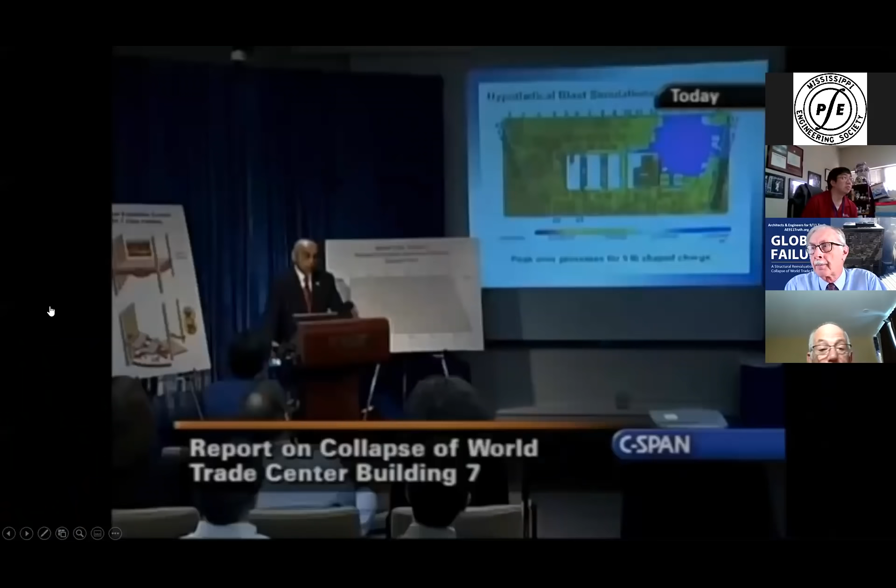Listen to NIST spokesperson Shyam Sunder's unqualified statement: 'What we found was that uncontrolled building fires caused an extraordinary event. The collapse of World Trade Center 7 was primarily due to fire.'

Architects and engineers had done enough research to recognize that fires alone did not explain the cause of collapse of Building 7. To delve more deeply into what caused Building 7 to collapse, architects and engineers funded a 4-year study led by Dr. Leroy Hulsey.

So what's the problem? Prior to 9/11, no other steel frame high-rise buildings had totally collapsed due to fire. Therefore, it is essential that the failure mechanism for this building be understood. Subsequently, the UAF agreed to re-examine what caused Building 7 to collapse.

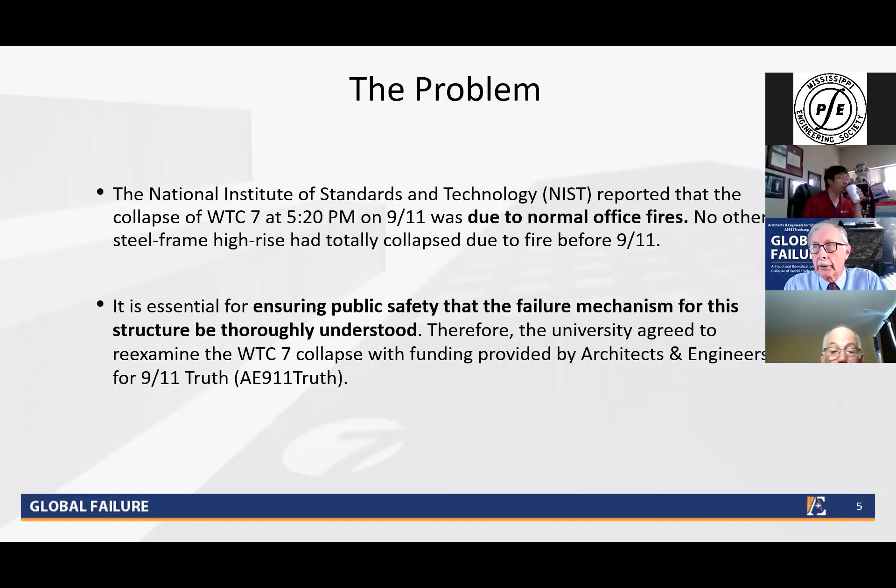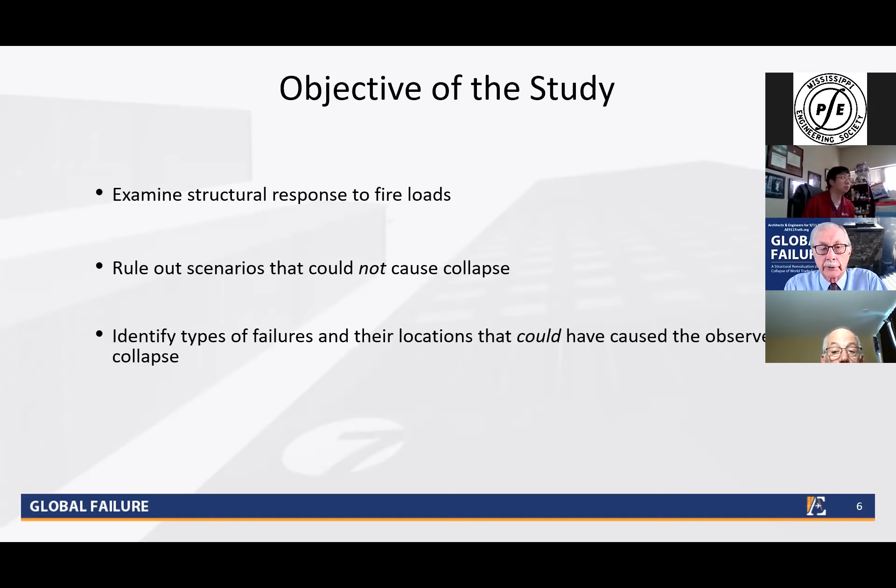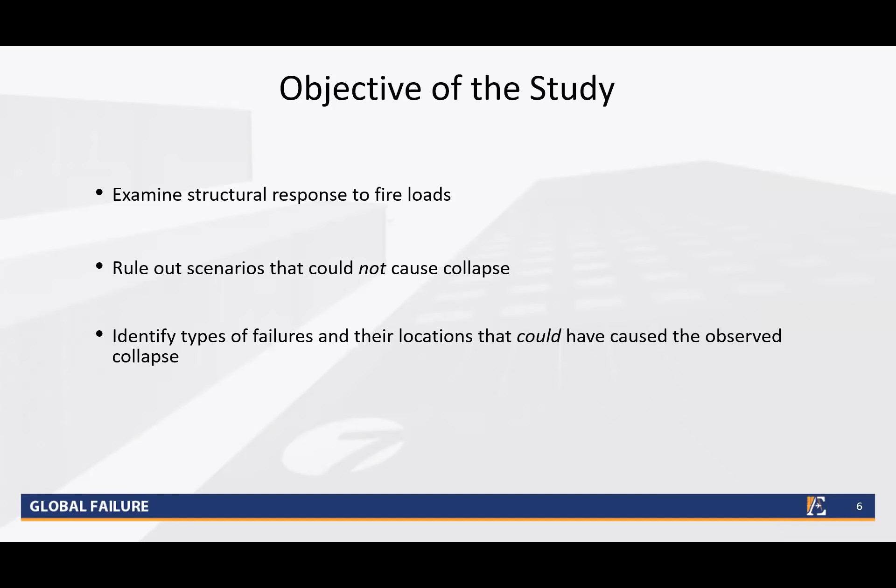The objective of the UAF study was to, one, examine the structural response to fire loads; two, rule out scenarios that could not cause collapse; and three, identify types of failures and their locations that could have caused the observed collapse. The UAF study used the same material properties that NIST used.

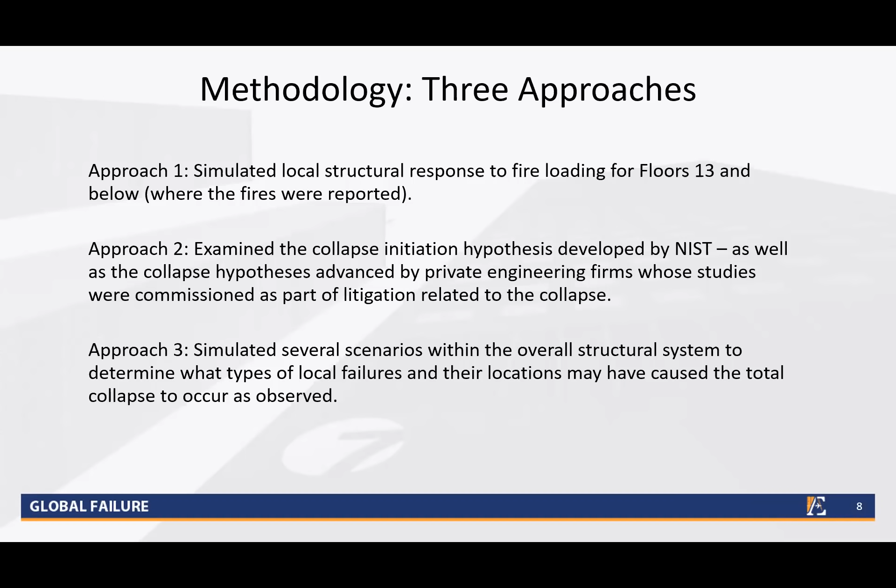The methodology included three approaches: one, simulate the structural response to the fire loading; two, examine previously developed collapse hypotheses; and three, simulate scenarios that are consistent with the building collapse as observed. They studied reports previously issued by FEMA, NIST, and two private parties.

Well, how, where, and to what extent did Building 7, shown in brown on the next slide coming up, located about 350 feet from World Trade Center number 1, get damaged?

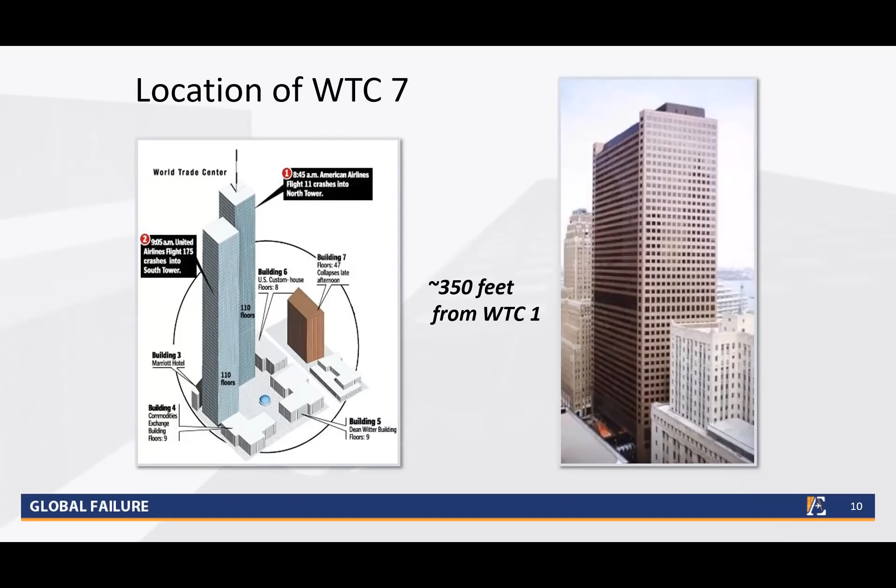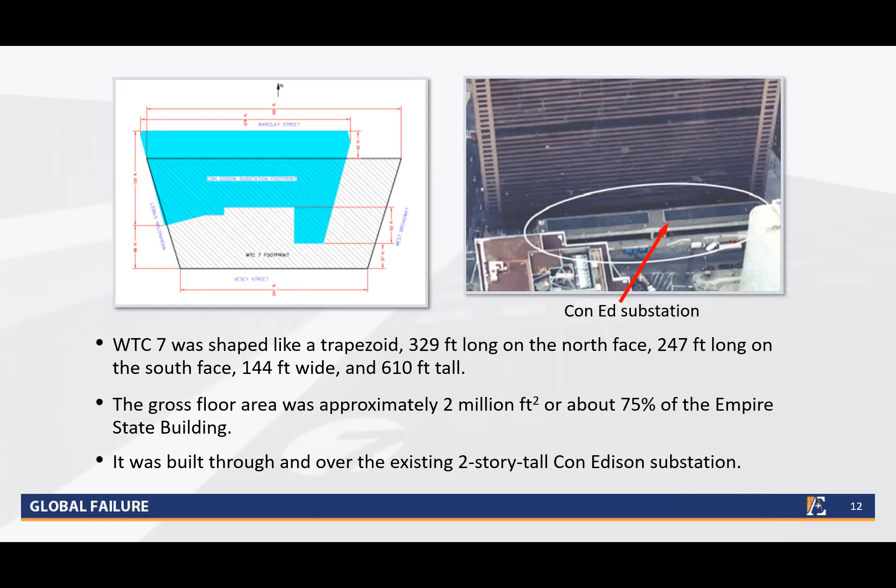Building 7 was built through and over the existing 2-story tall Con Edison substation. The plan view on the left shows the trapezoidal crosshatched footprint of Building 7 and the Con Edison substation footprint in turquoise. Rotate the plan view 180 degrees to relate it to the top of the substation in the picture. The Building 7 columns were supported through the substation.

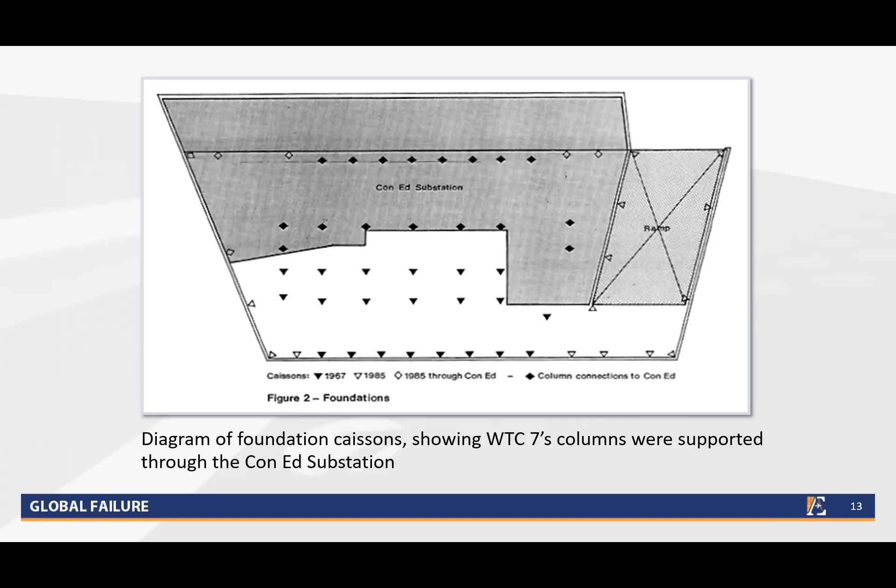There were 82 columns, 58 on the perimeter, and 24 in the central core.

The most northeasterly column in the central core, number 79, was the most heavily loaded column by virtue of the floor area it supported, and because much of the load from the east penthouse was supported by column 79.

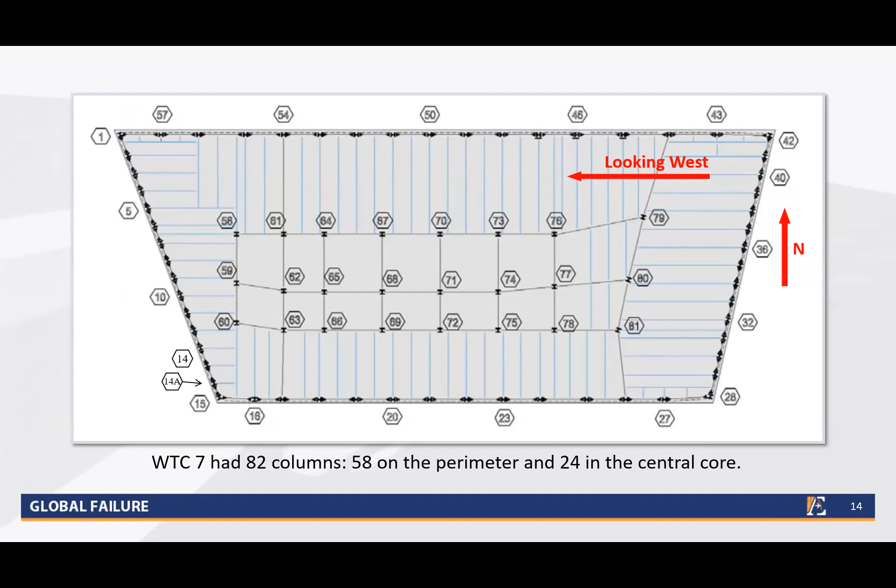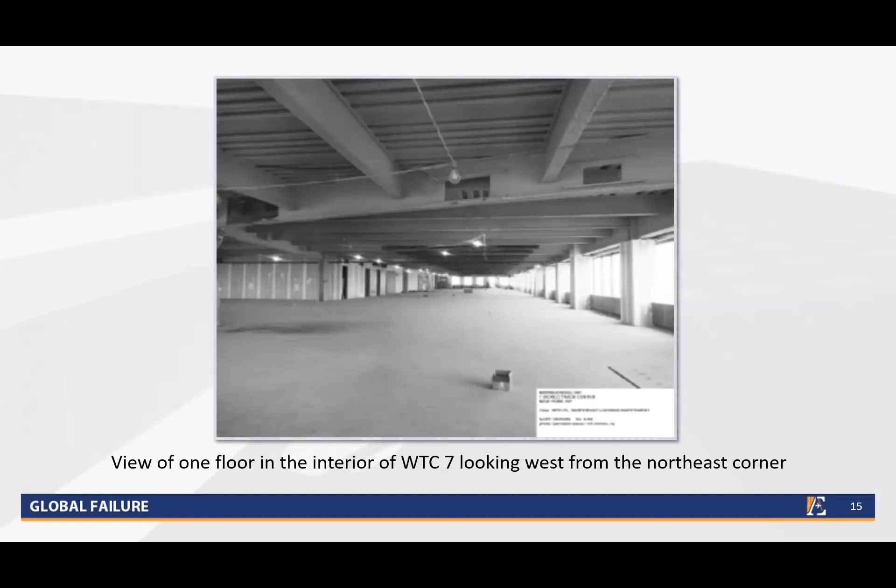A looking-west picture taken during construction is shown next. Column 79 is just out of view on the left. The girder that frames into column 79 runs across this picture. NIST claims that the girder on this line, on floor 13, was forced off its bearing pad at column 79. We'll take a closer look at these details shortly.

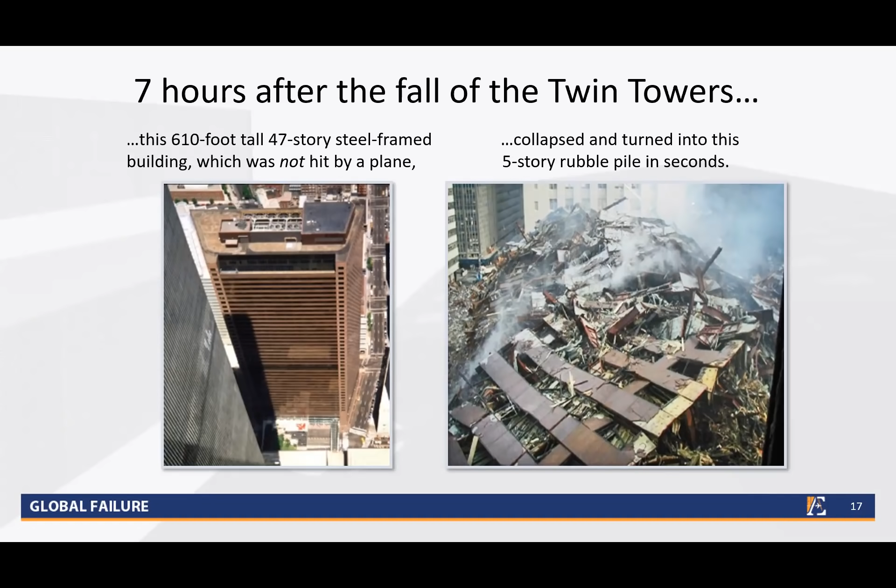Here's a video that starts after the east penthouse had already fallen below the roof level. Listen closely to how the reporters described what they were seeing and hearing.

For the third time today, it's reminiscent of those pictures we've all seen too much on television before, when a building was deliberately destroyed by well-placed dynamite to knock it down.

Did they actually use the word 'brought down', and who was it that was telling you this? The fire department, and they did use the word, 'we're going to have to bring it down.'

We heard this sound that sounded like a clap of thunder. It looked like there was a shock wave ripping through the building, and the windows all busted out. About a second later, the bottom floor caved out. The building followed after that, and we saw the building crash down all the way to the ground.

And I turned in time to see what looked like a skyscraper implosion. It looked like it had been done by a demolition crew, the whole thing just collapsing down on itself. It was almost as if it were a planned implosion. It just pancaked.

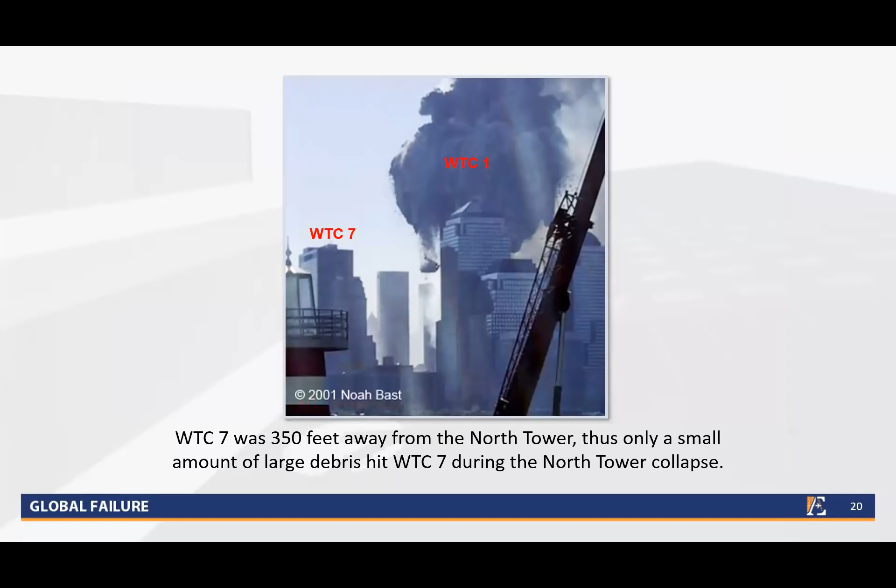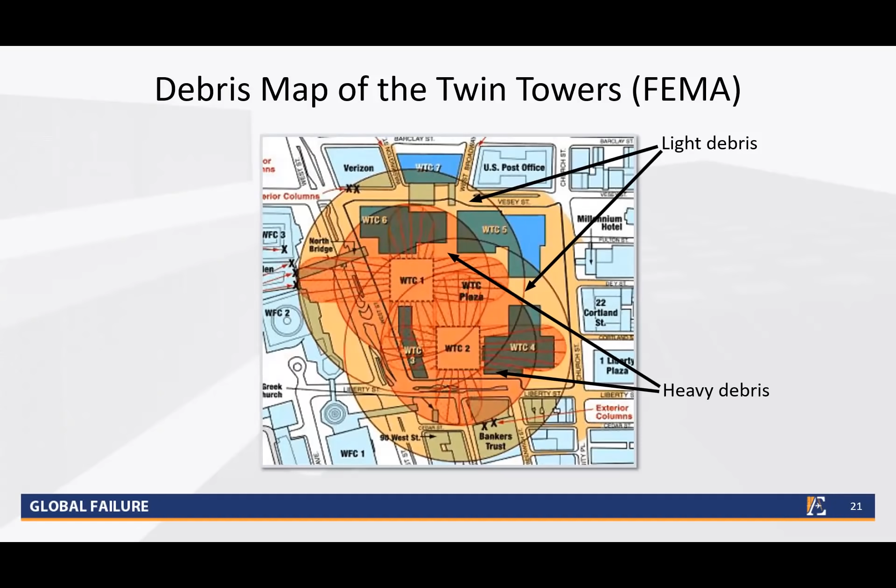Again, Building 7 was 350 feet away from Tower 1. Buildings 3, 4, 5, and 6 were subjected to much heavier debris fallout from the towers than was Building 7, seen near the top, all of which suffered extensive damage. However, none of them totally collapsed like Building 7 did.

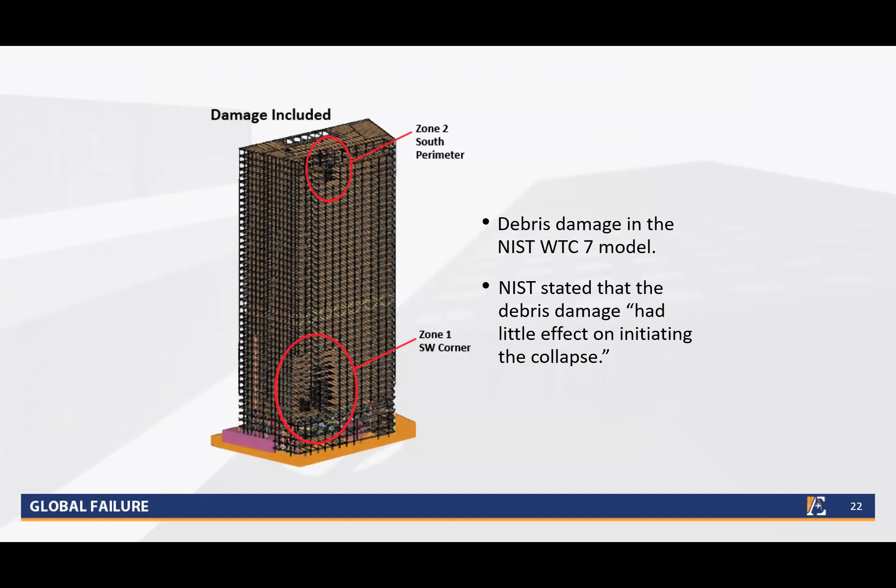According to NIST, most of the debris damage occurred near the lower west end of the south face of Building 7, but they claim that a progressive collapse was initiated with the collapse of Column 79, located in the diagonally opposite area of the building.

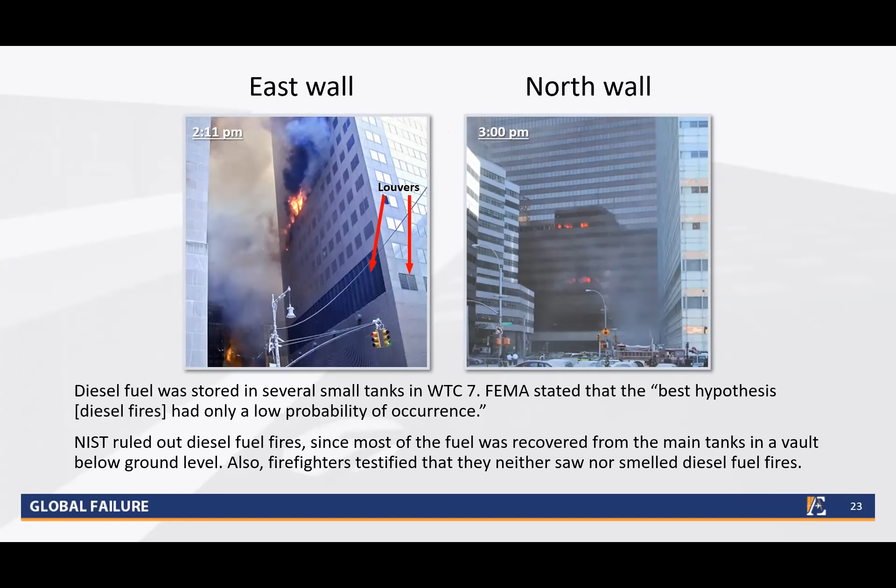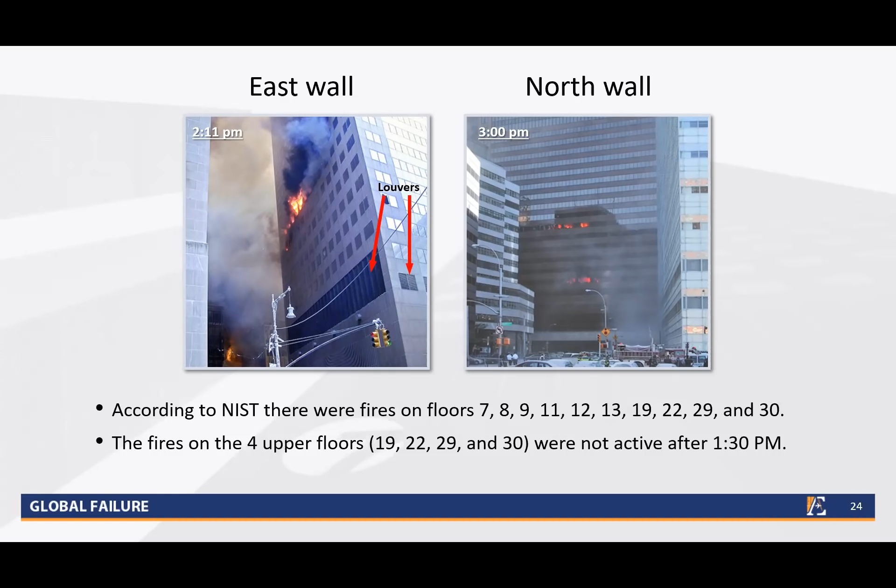Fires were observed on the two sides of Building 7 that were shielded from tower debris, on floors located primarily between the 7th floor and the mid-height of the building.

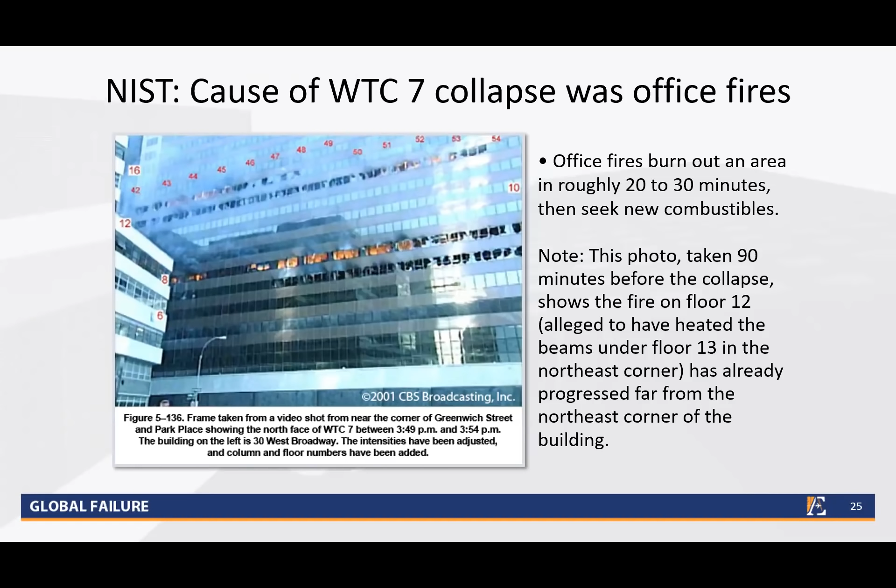This is the north wall. Floor numbers are shown up the left side and column numbers across the top. This photo, taken 90 minutes before the collapse, shows that the fire on floor 12 has already progressed far from the northeast corner of the building. The NIST collapse theory, in summary, is that the floor beams in the northeast corner of floor 13 pushed the

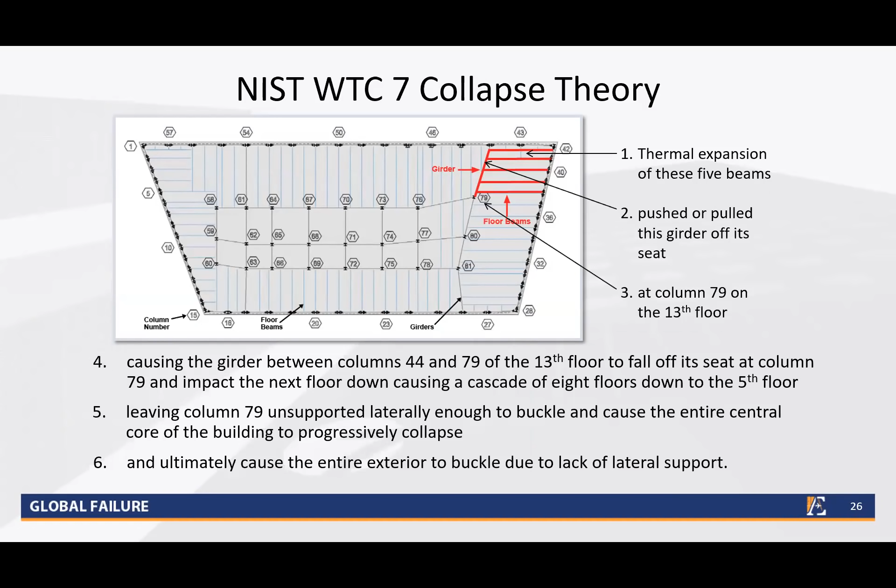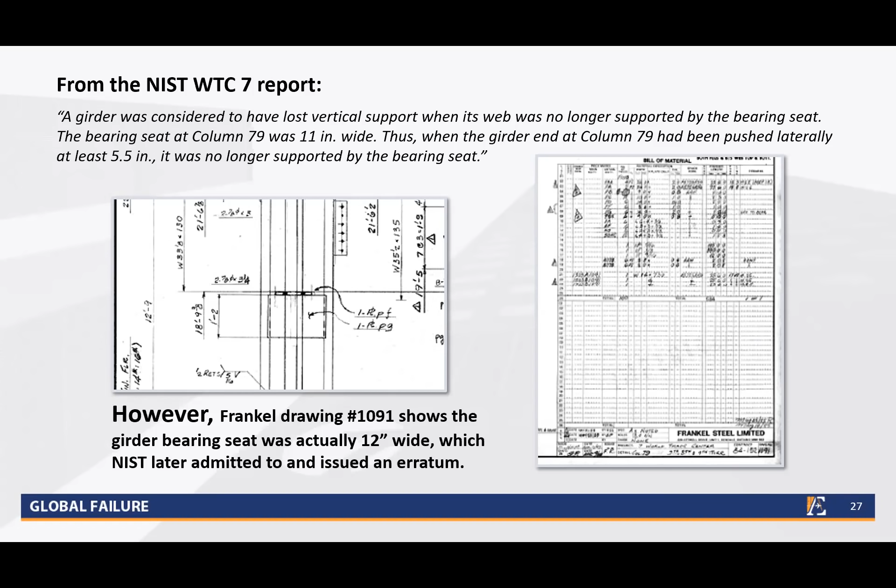interior supporting girder off its supporting bearing pad on column 79, precipitating a progressive collapse of the entire building. But was it possible for the girder to be pushed off its bearing pad? NIST initially claimed that the bearing pad was 11 inches wide, and once the girder had been pushed laterally 5.5 inches, it was no longer supported. However, the shop drawing showed a 12-inch wide bearing seat, which NIST later admitted to.

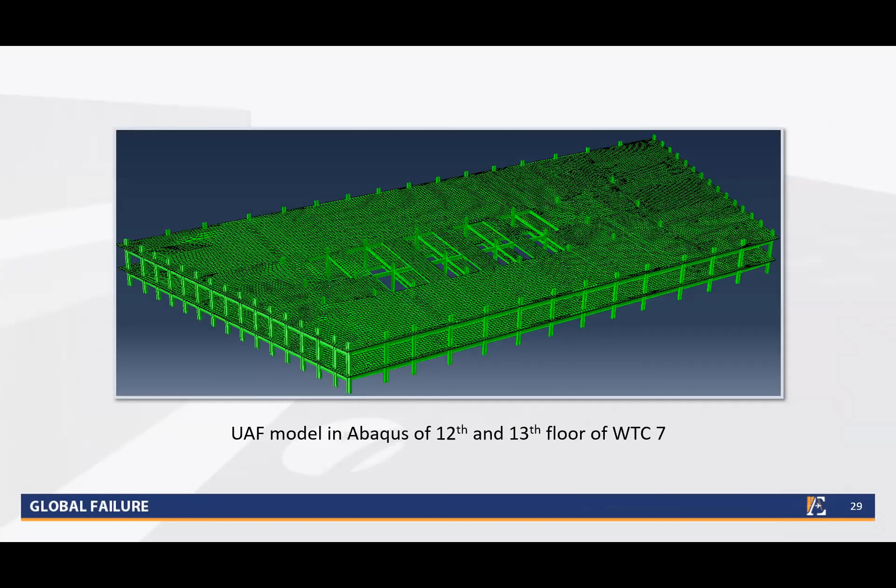A progressive failure starting at column 79 was the key to NIST's explanation of the cause of collapse. The UAF study therefore examined the related conditions in depth. The girder movement relative to its bearing seat at column 79 was examined using two different programs in various boundary conditions. Here's their Abaqus model of the 12th and 13th floors.

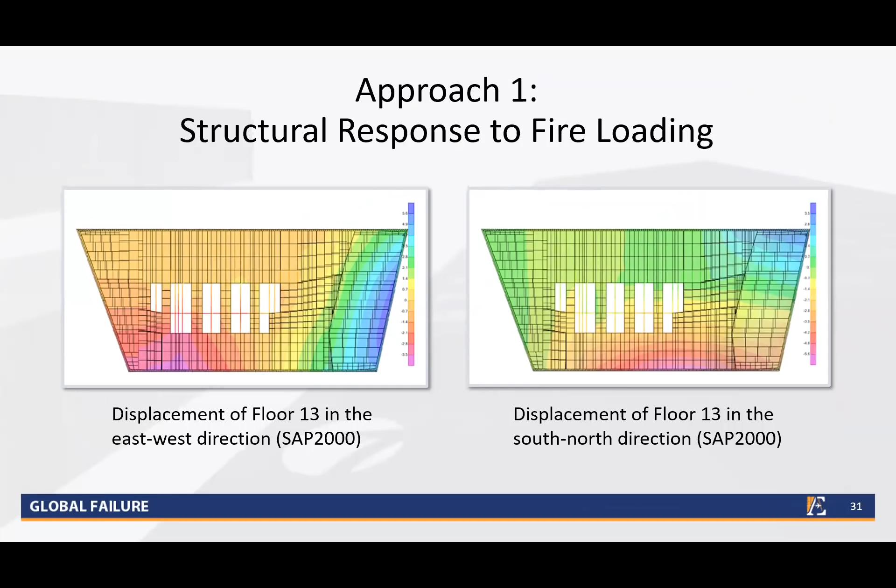NIST worst case 13th floor temperatures were used in the UAF model. Floor 13's displacement was calculated using the SAP 2000 program and NIST's temperature conditions. The eastward movement is greatest along the east edge of the floor, the area shown in blue. However, NIST based its analysis on the assumption that the east end of the floor beams did not move. Hence, their calculations showed 6.25 inches of floor beam displacement at the girder.

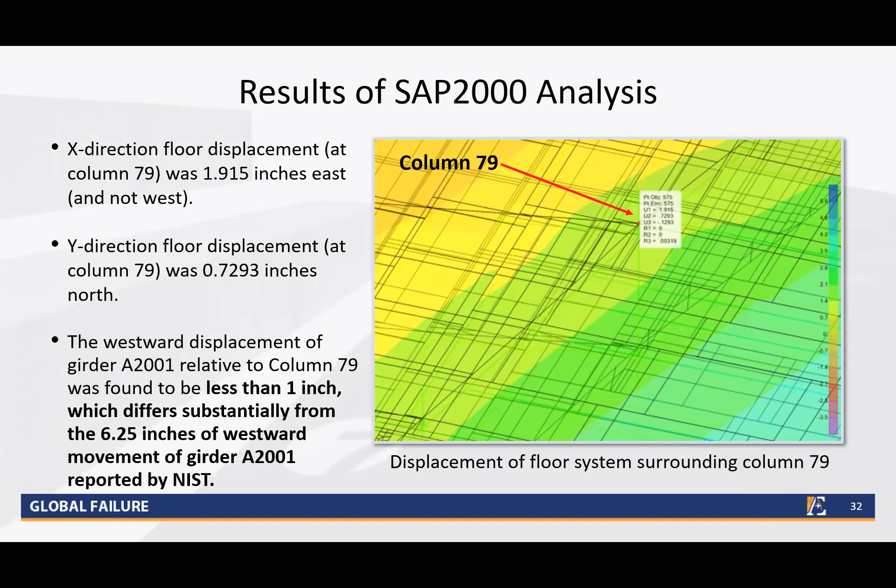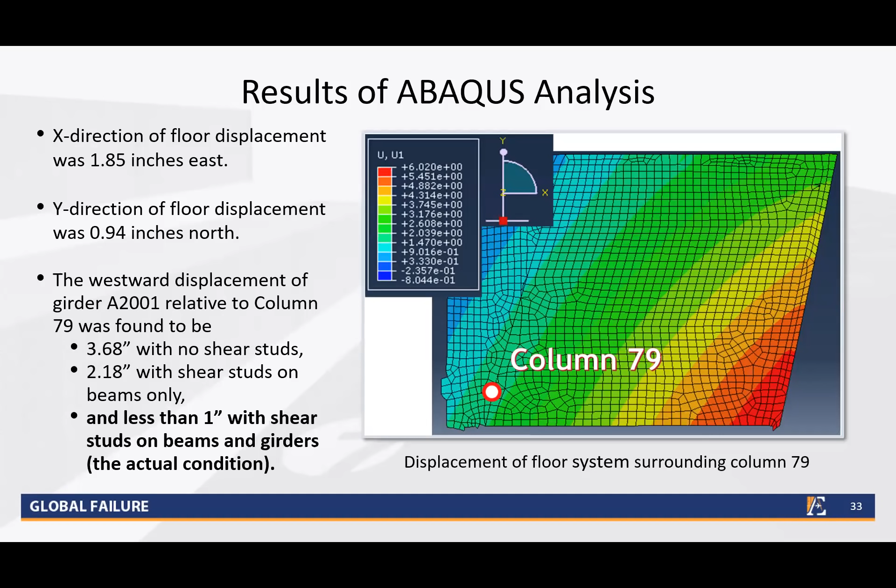The SAP analysis, recognizing a more realistic structural movement, calculates a differential movement between column 79 and the girder of less than 1 inch. Using the ABAQUS program with shear studs connecting the floor beam, the floor slab to the beams and girder, the UAF study calculated a girder displacement relative to the column of less than 1 inch. Using the NIST boundary conditions, ABAQUS calculated a westward displacement of 5.11 inches, more than an inch less than the 6 inches needed to push the web of the girder past its 12-inch seat at the column.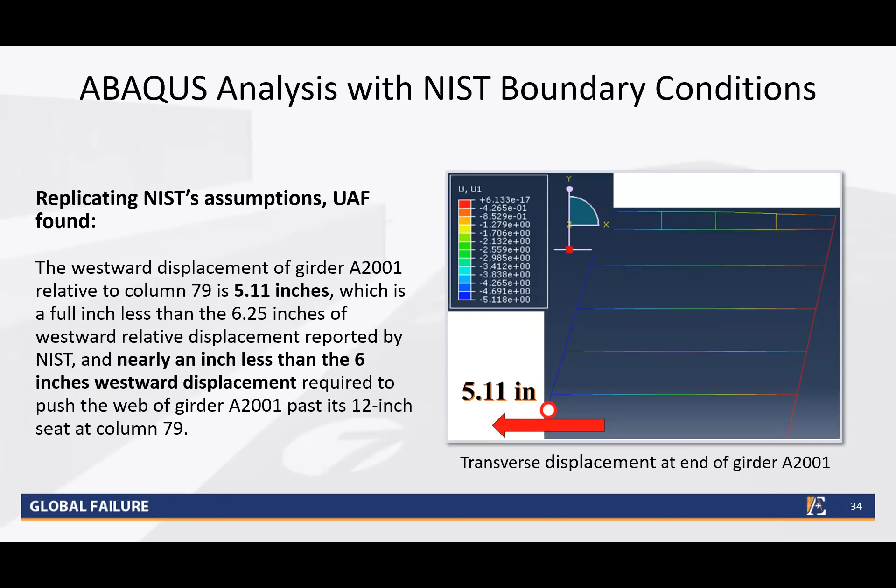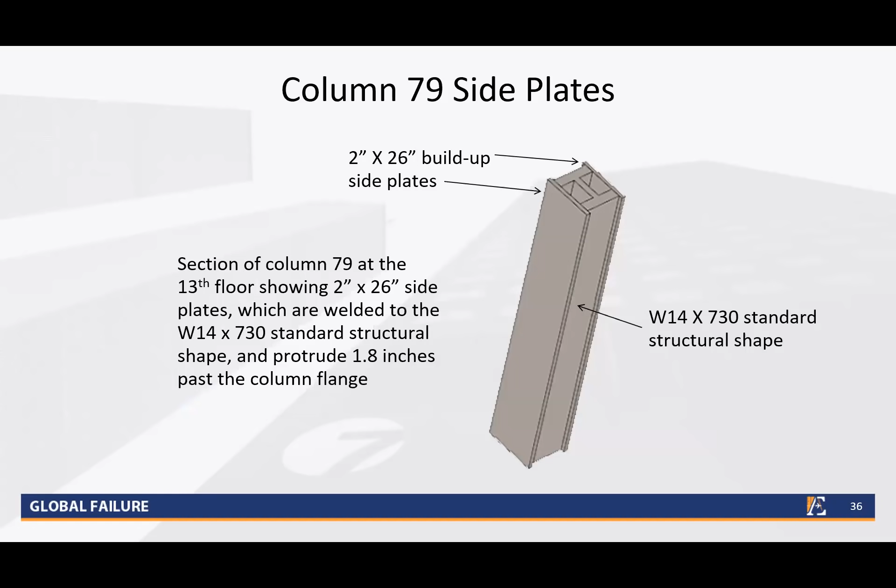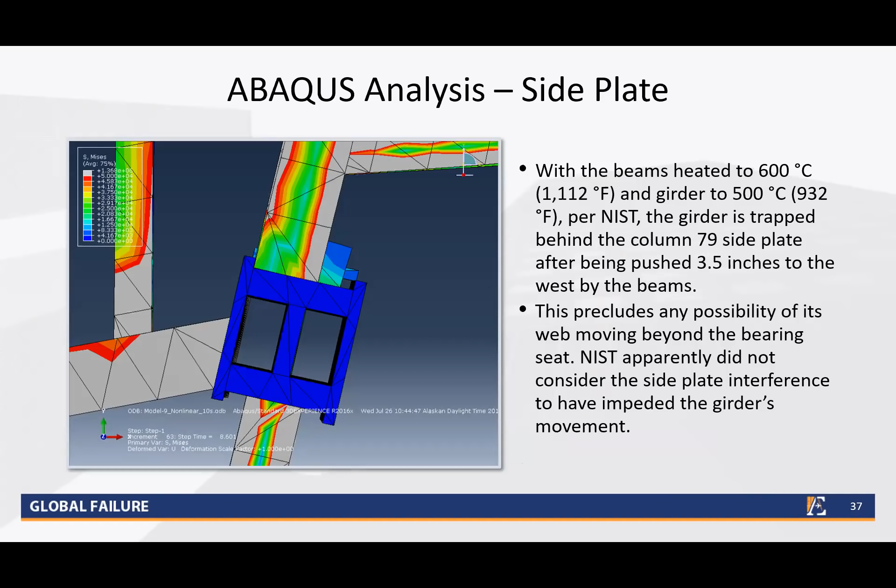Approach 2: evaluation of NIST collapse initiation theory. Note that the side plates in column 79 protrude 1.8 inches past each side of the flange face to which the bearing seats were attached. Regardless of how far west the floor beams might have theoretically pushed the girder, the column side plates would have prevented the girder from moving off the bearing seat.

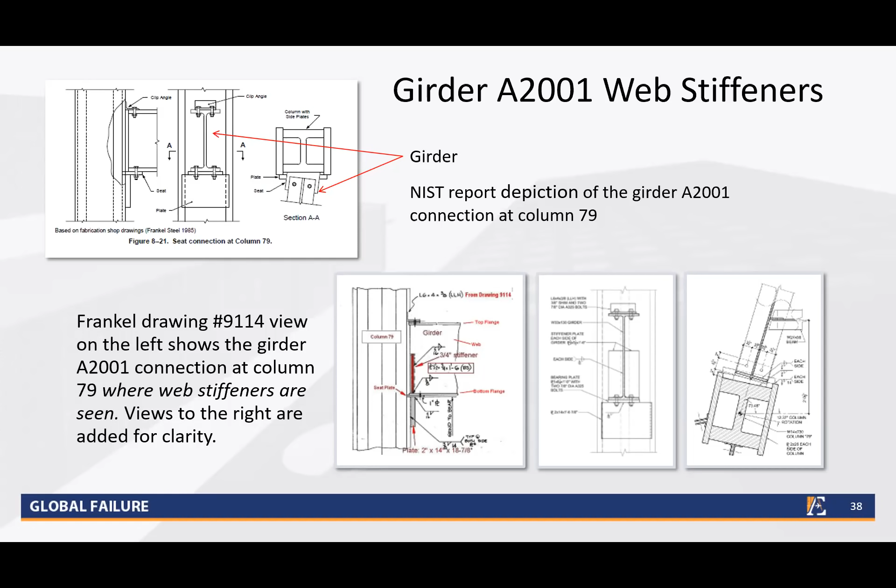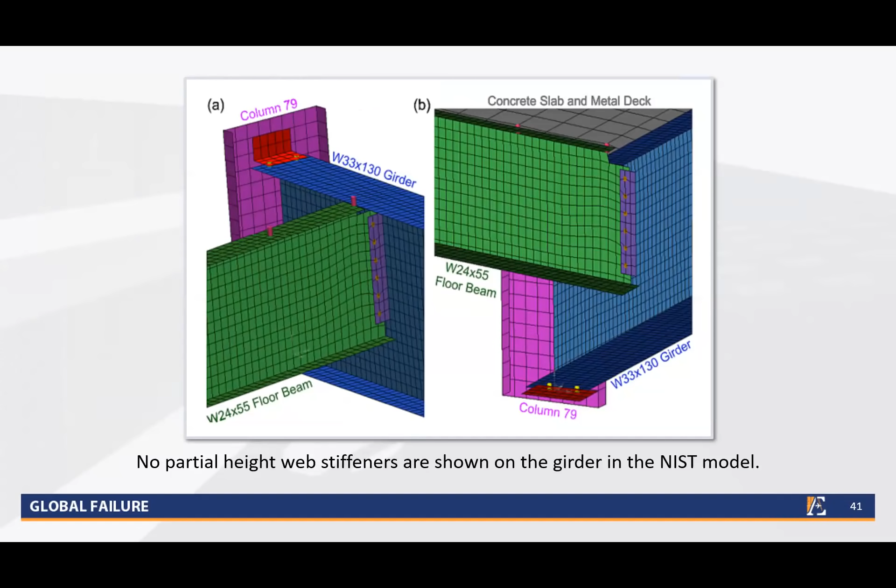Even if the girder web moved beyond the edge of the bearing seat, the stiffened girder flange would not have failed.

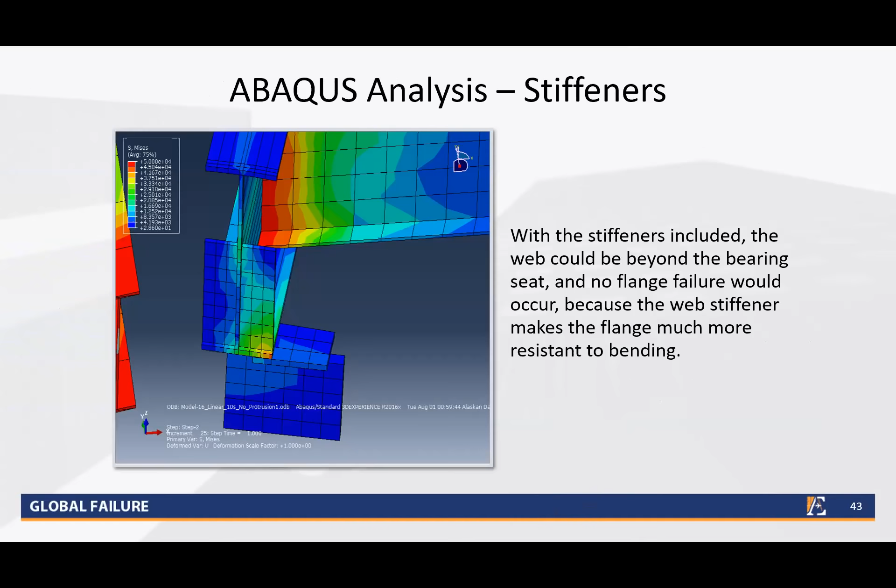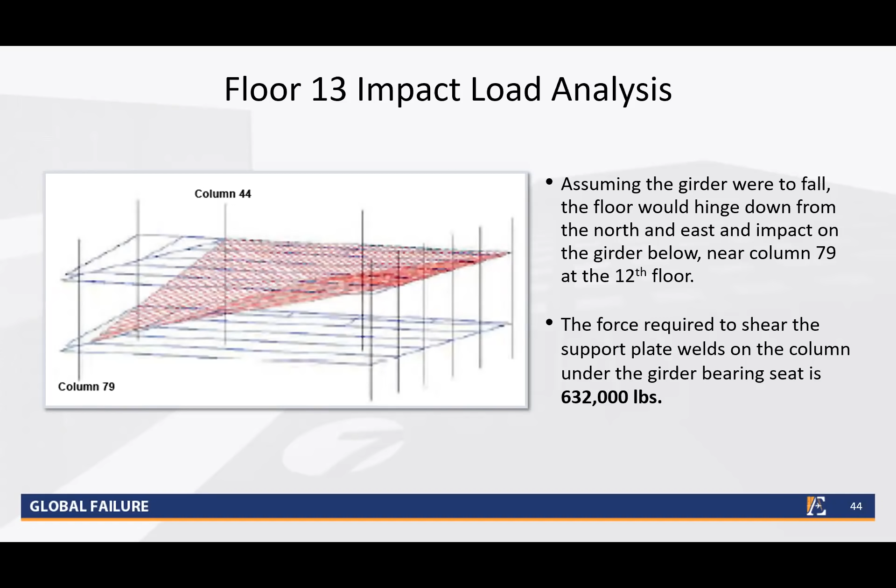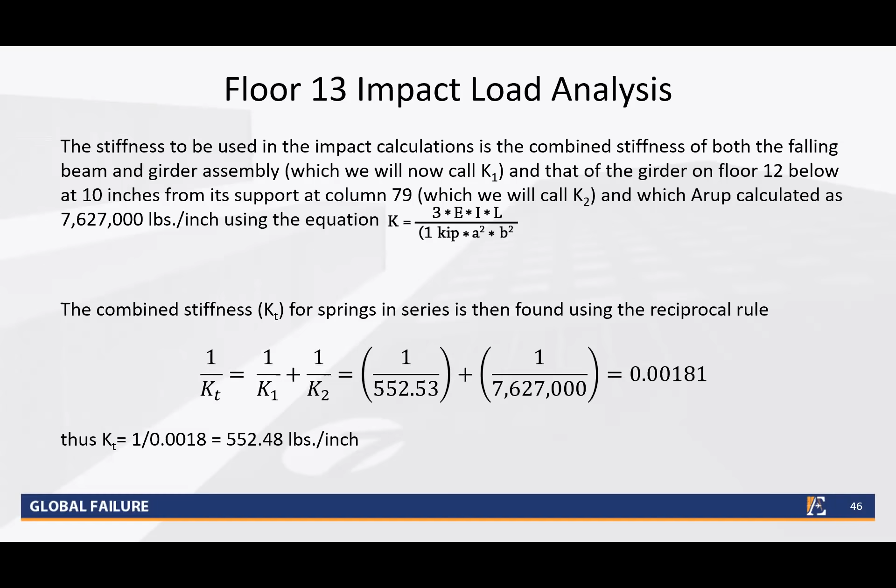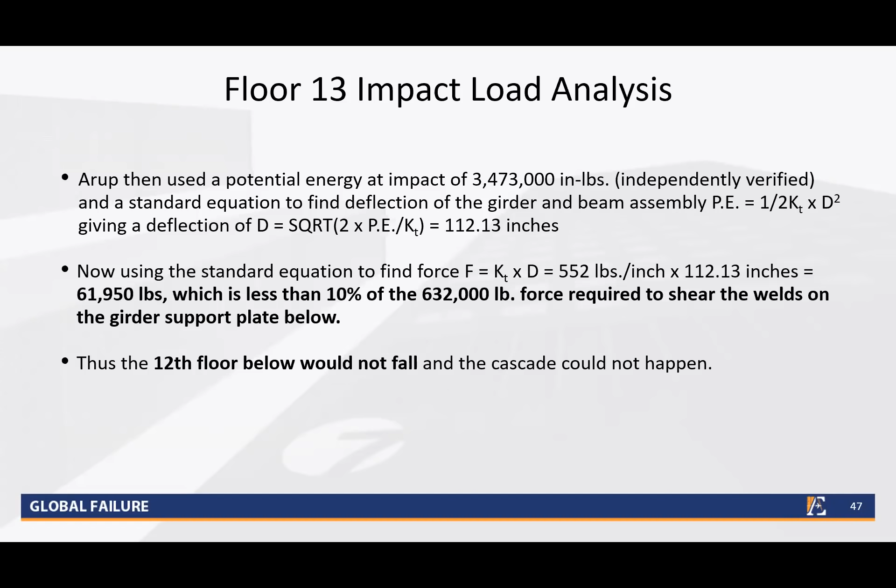But let's take a look at what might have happened if somehow the girder connection to the column did fail and the 13th floor fell to the 12th floor. The support plate connection at floor 12 had a capacity of 632 kips. According to NIST, the shear connectors did not keep the floor slab connected to the steel framework during the collapse, so just the weight of the beams and girders was used in calculating the impact load on floor 12. The combined stiffness of both the falling framework and floor 12 girder was calculated. The resulting impact on the 12th floor is 62 kips, less than 10% of the 632 kip capacity of the 12th floor girder support plate. Thus, the 12th floor would not fall, and the cascade would not happen.

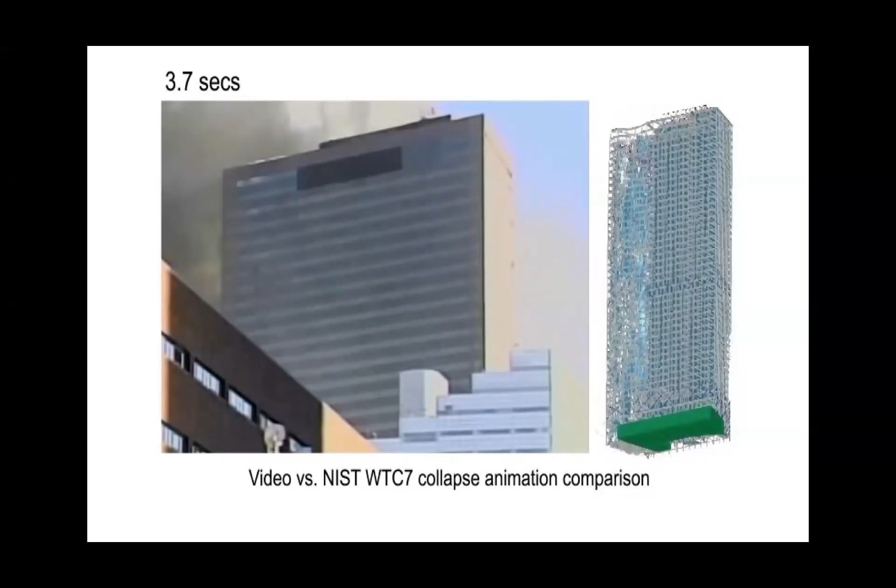Okay, now let's compare the NIST program model with a video of the actual collapse. Compare the deformations in their model against the lack of any significant deformations in the video of the collapsing building. Also note that the NIST program model stops well before the collapse is complete.

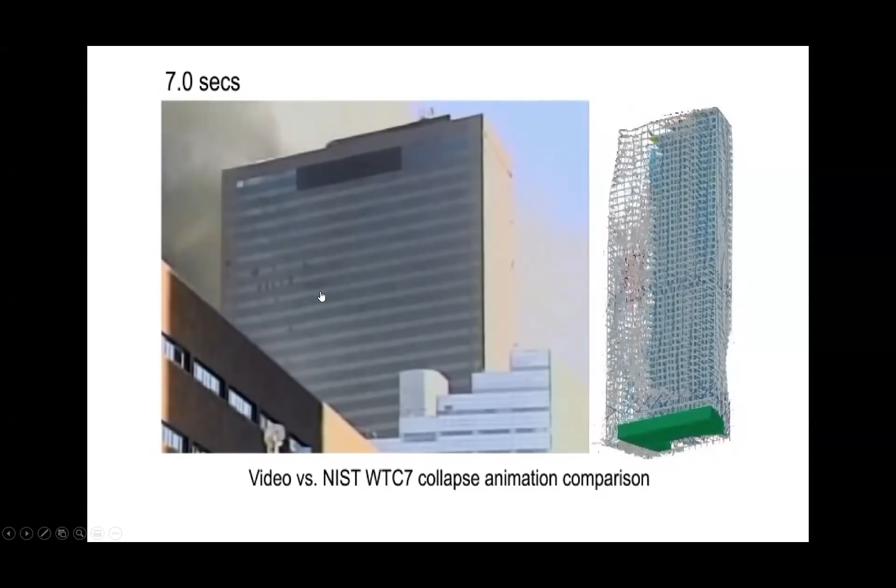Now let's compare the NIST program model with a video of the actual collapse. Compare the deformations in their model against the lack of any significant deformations in the video of the collapsing building.

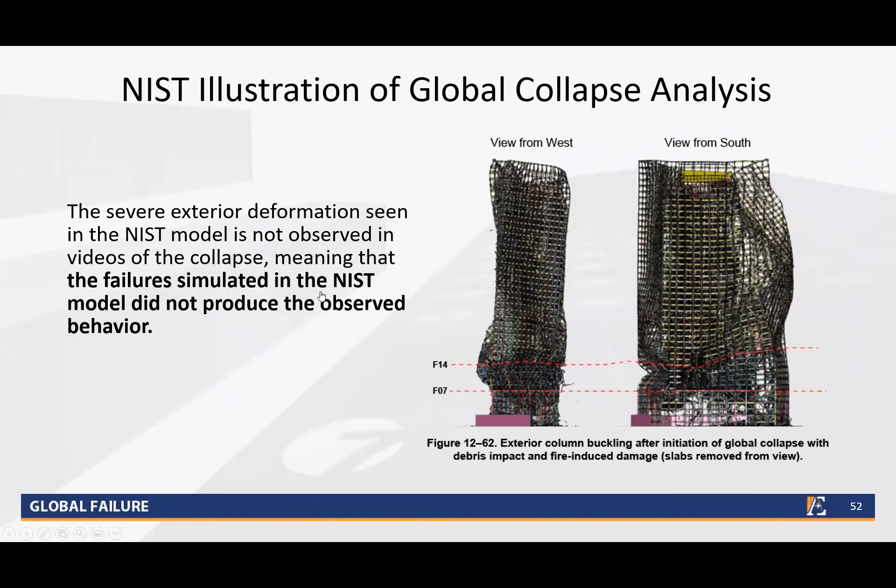Let's see, okay. All right. What do we got here? 50 feet. Oh, we're down to 50 feet. Okay.

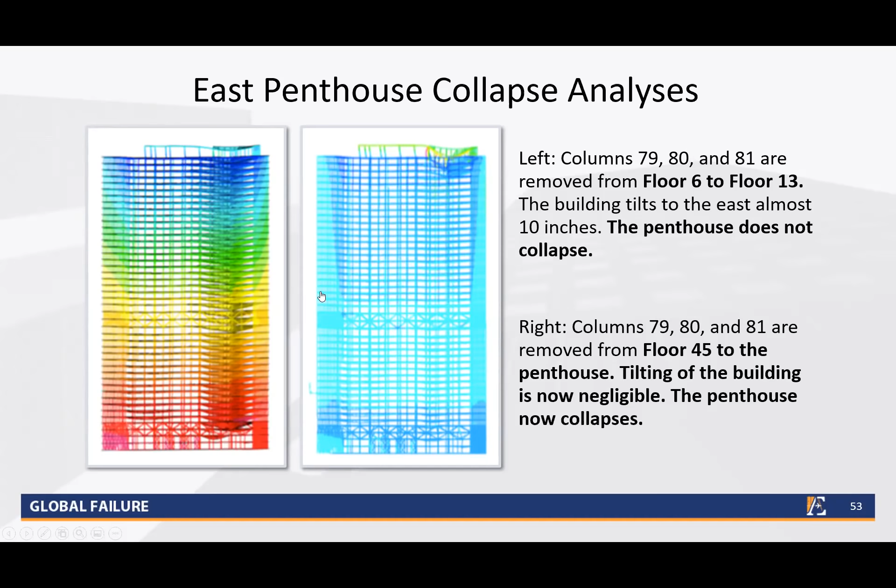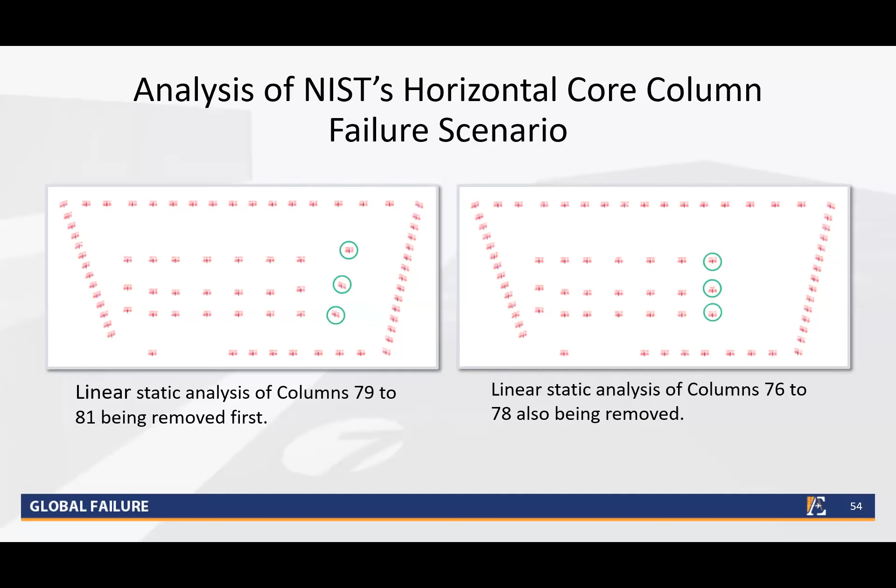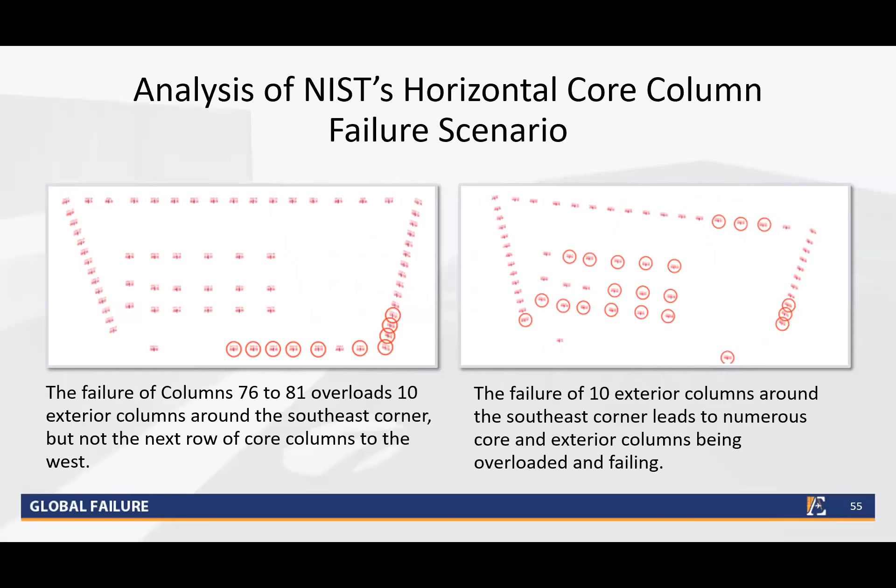A dynamic analysis leads to a similar failure scenario.

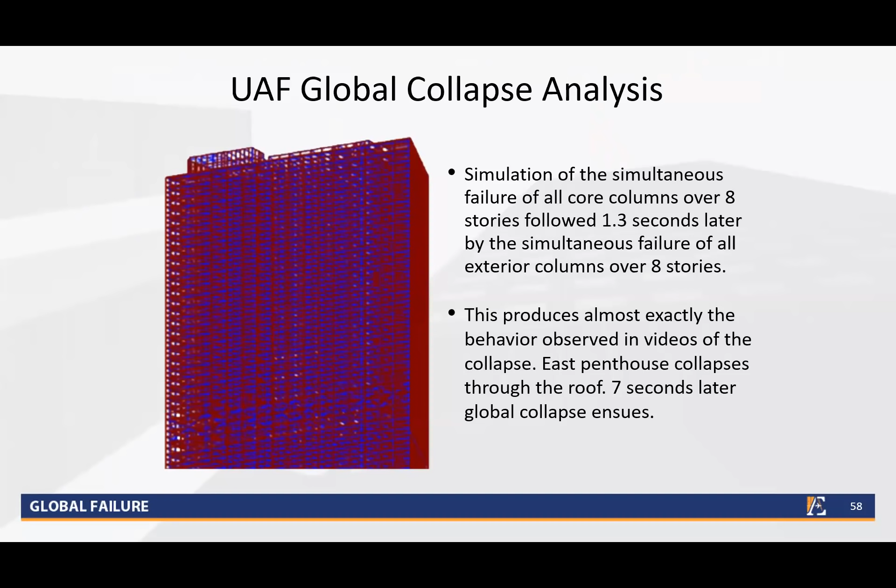East penthouse, rest of the HVAC, and the building coming down.

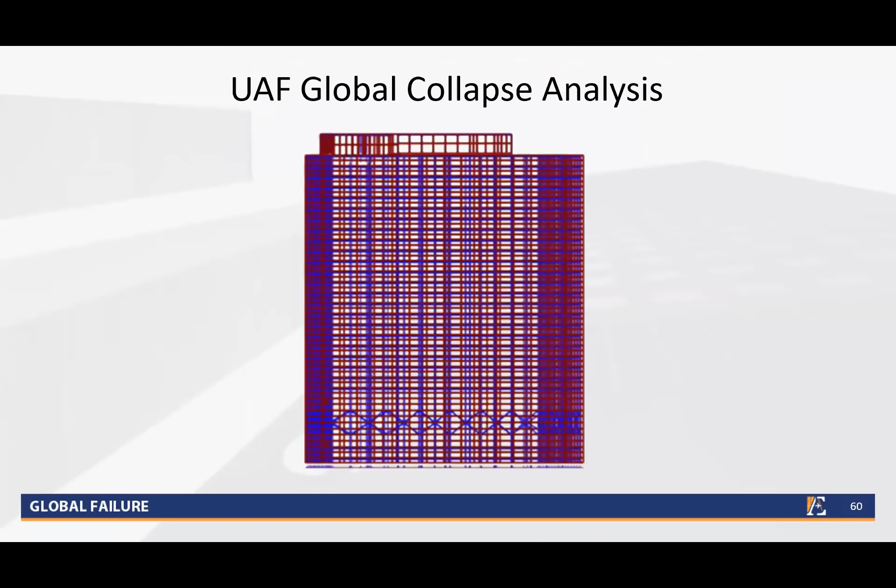Here it is again, looking at the north face: east penthouse, the rest of the HVAC equipment, and then the building coming down uniformly.

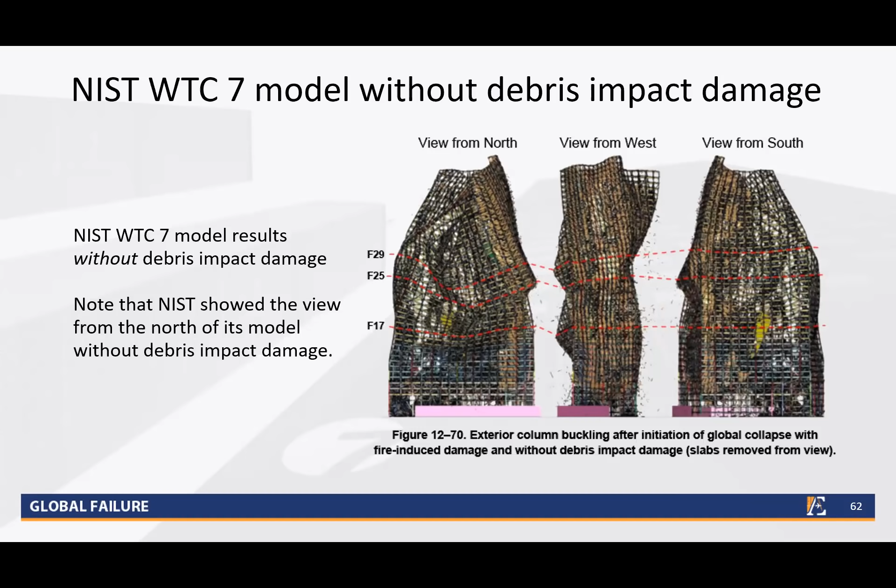The NIST model of the collapse, which did not include any structural damage caused by debris impacting the south face, shows considerable deformation not seen in the videos.

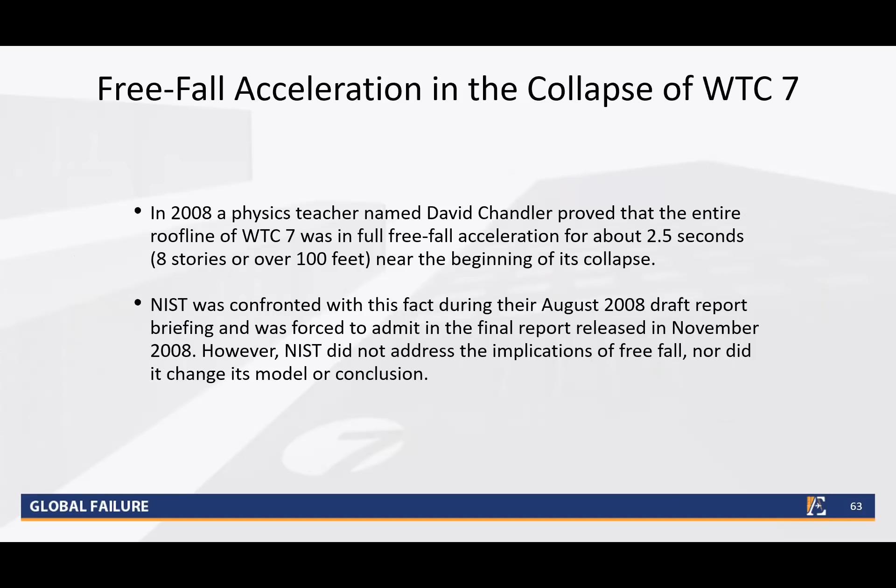In 2008, David Chandler, a physics teacher, proved that the roof line was in free fall for 2.5 seconds, which NIST was forced to admit, but they did not address the implications of free fall. Here's his graph, and his comments follow.

Just by watching it, anybody can see that Building 7 fell close to free fall. To measure it, I used software to track the corner of the building and compute a graph of downward velocity as a function of time.

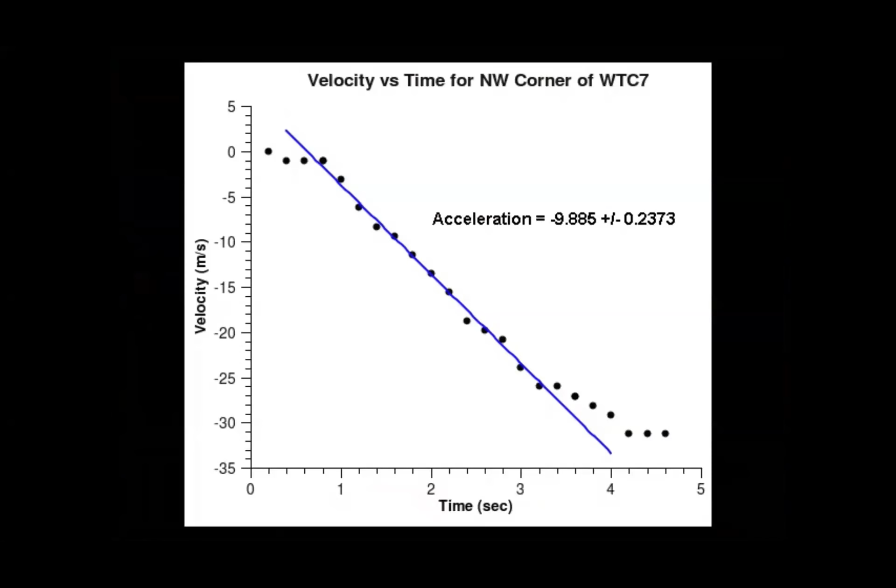The graph had a long, straight section indicating constant acceleration. Measuring the slope, I found the acceleration to be within 1% of the acceleration of gravity for the first 2.5 seconds. In other words, the building fell through its own structure with zero resistance.

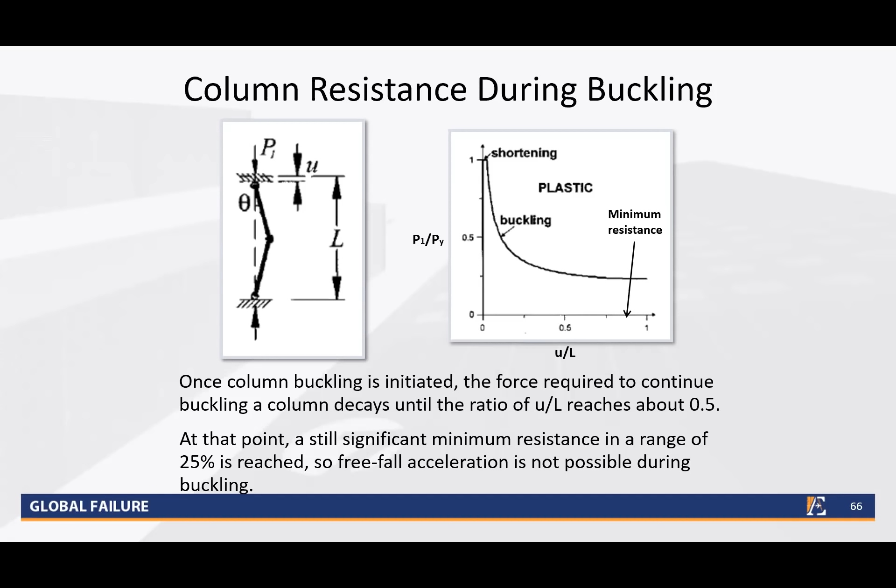So how much resistance do columns provide once they start buckling? A lot, up to 25%, even as they completely buckle.

What's the significance of free fall acceleration? The NIST model never accelerates at free fall and thus cannot explain this free fall episode in the collapse.

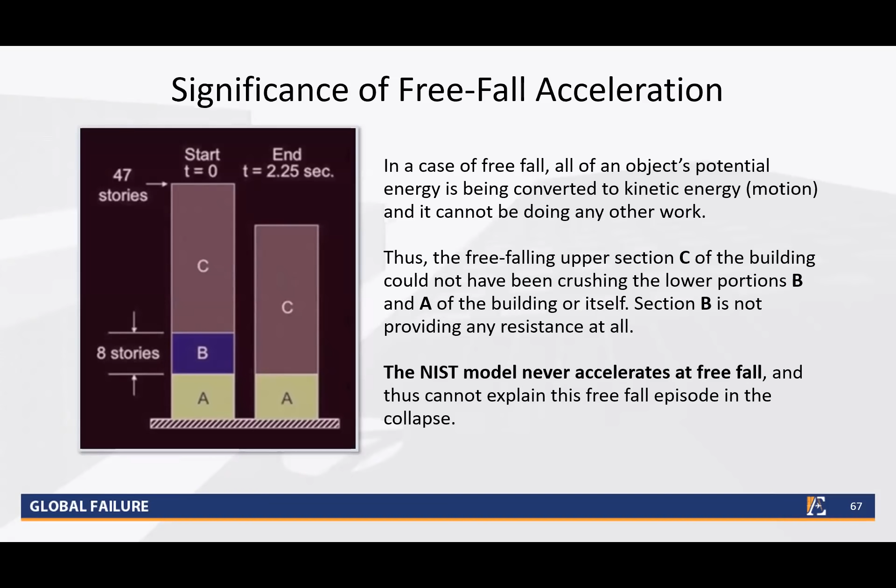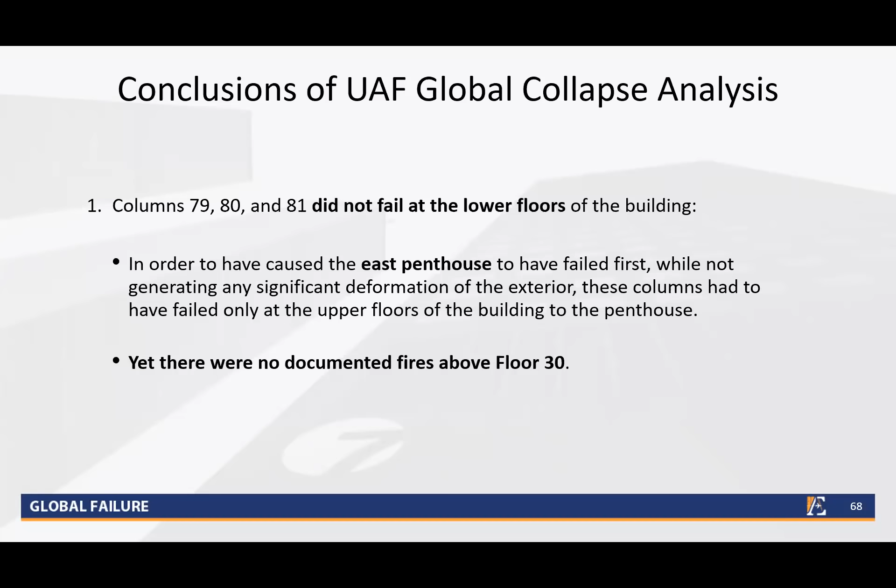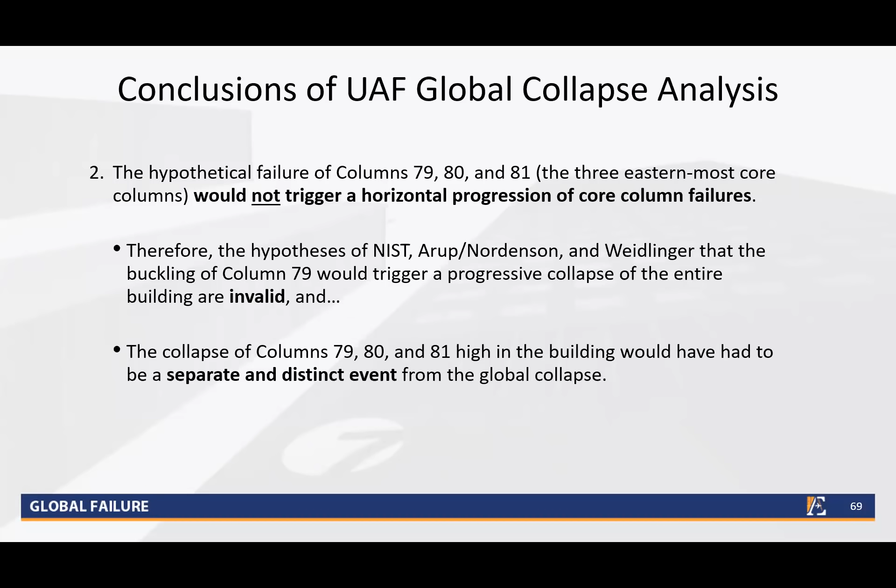What are the conclusions of the UAF global collapse analysis? First, columns 79, 80, and 81 did not fail at the lower floors of the building. Second, the hypothetical failure of the 3 easternmost core columns would not trigger a horizontal progression of core column failures, thereby invalidating the hypotheses of the earlier public and private reports.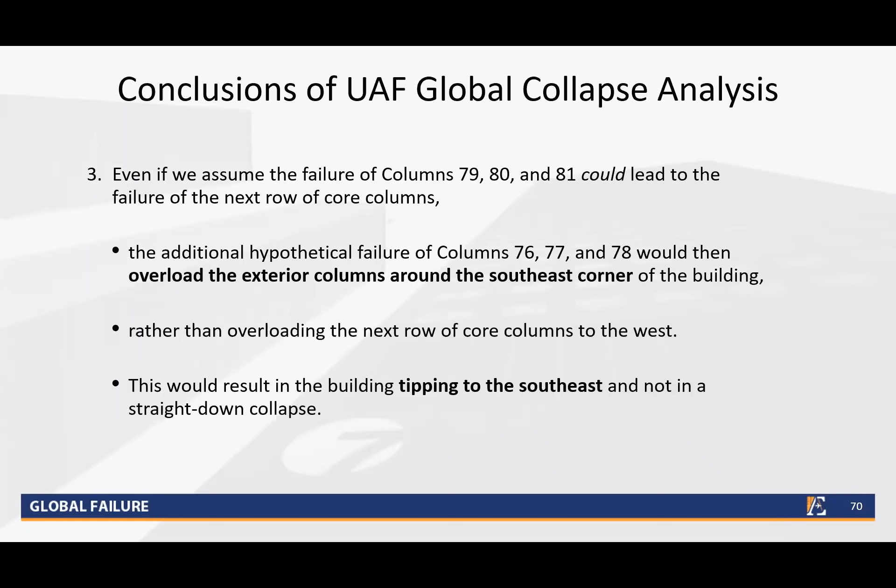Third, even if we assume that failure of the 3 easternmost core columns could lead to failure of the next row of core columns, the building would tip southeastward and not fall straight down.

Fourth, the simultaneous failure of all core columns over 8 stories, followed 1.3 seconds later by the simultaneous failure of all exterior columns over the same 8 stories, produces almost exactly the behavior observed in videos of the collapse.

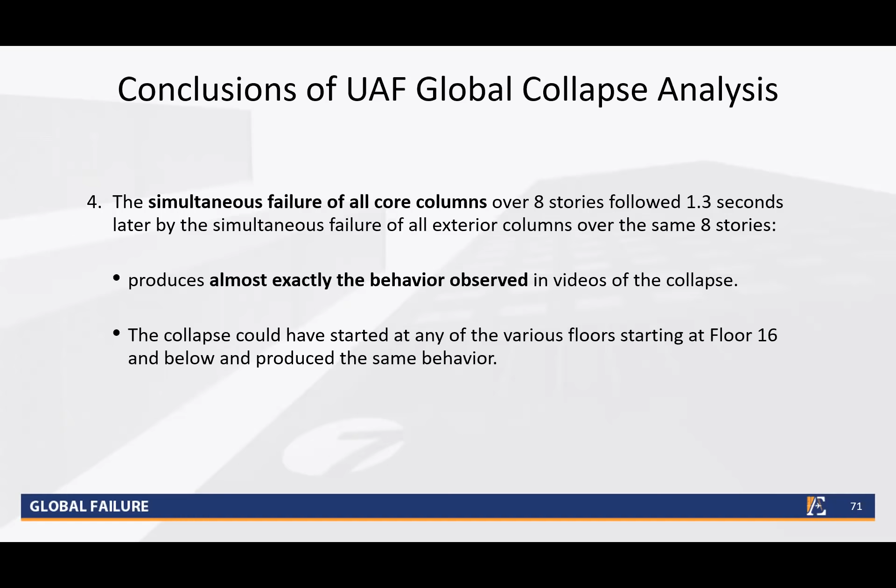Fifth, the collapse of Building 7 was a global failure, not a progressive collapse involving a sequential failure of columns throughout the building.

Sixth, the UAF team was unable to identify any progressive sequence of failures that could have taken place and caused a total collapse of the building.

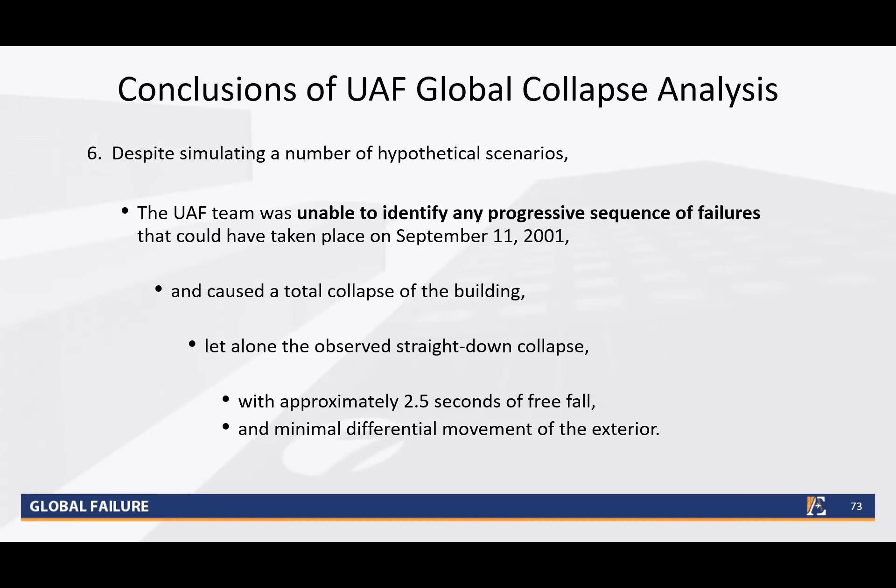This brings us to ethics: safety, competence, truthfulness, faithfulness, merit, and professional honor. When decisions are made after the fact in order to cover up ethical violations, errors, or omissions, these decisions become additional ethical violations.

So, time for another poll. After seeing this, who agrees that the official reports are so seriously flawed that a new independent investigation is called for? Can we do a hands up or whatever, or wave, or have you become convinced?

Okay, I see some thumbs up. A lot of people are indicating that, yeah, all right, they've seen enough to be convinced that a new report is warranted, a new independent investigation. Okay, well, I realize there was a lot of information there, so I'll give you time to digest it.